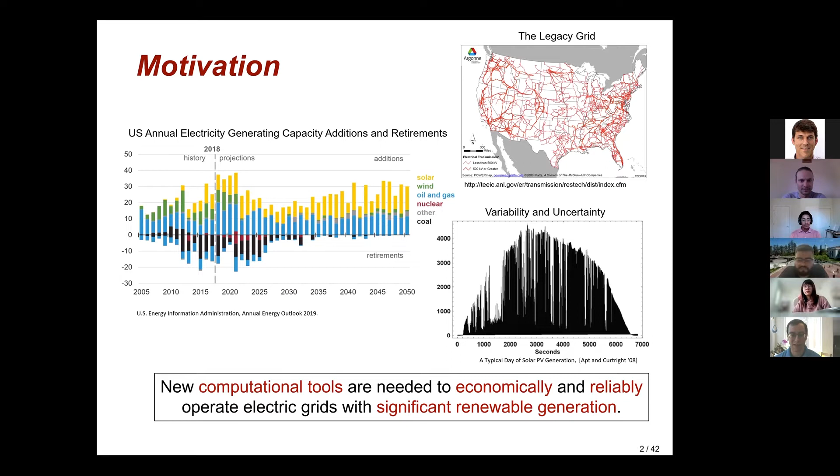Anyway, so the story is we need new computational tools to economically and reliably operate electric power grids when we have lots of renewable generation. And so at the heart of almost all of our optimization and control problems that we work on in power systems, we have some representation of the power flow equations. These are the equations that model the relationship between the voltage phasors and the power injections in the electric power grid. So here's one representation of these equations.

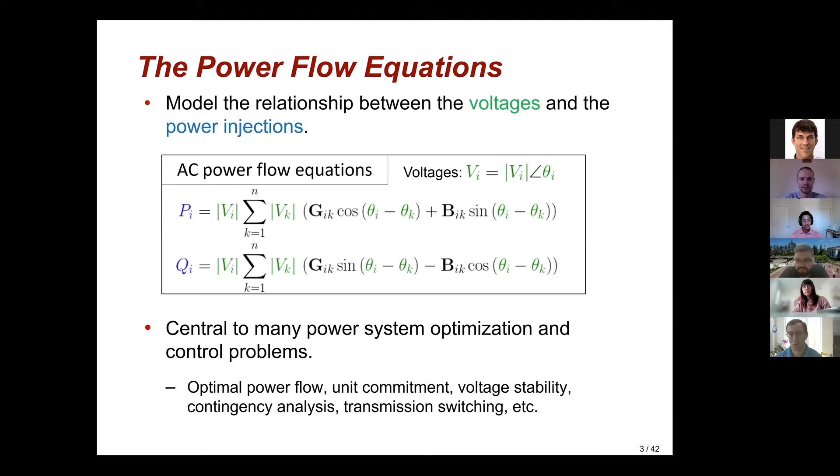Turns out there's lots of mathematically equivalent ways to write down the power flow equations. And you can actually get very different behavior depending on how you approximate or relax or represent the power flow equations in different coordinate systems. This is probably the most common representation, to put the voltages in their polar coordinates, so a magnitude and an angle, and then we get these coupled relationships between the active and reactive power injections, the voltage magnitudes, and the phase angles. And so these equations are in almost everything we do in power system optimization and control: optimal power flow, unit commitment, voltage stability analyses. Almost any problem that you care to solve will have these equations embedded somewhere.

As one prototypical example, we've got the optimal power flow problem, or OPF. This is a very stripped down version of this. I'll talk about some more sophisticated forms of this problem in a few minutes. But typically what we want to do is minimize the cost of generation. We have a set of engineering limits where we can't operate our generators outside of their upper and lower bounds. We want the voltages to be within reasonable ranges, and we have to make sure our line flows are within their limits. And then we have these power flow equations, the equality constraints representing the actual physics of the power system.

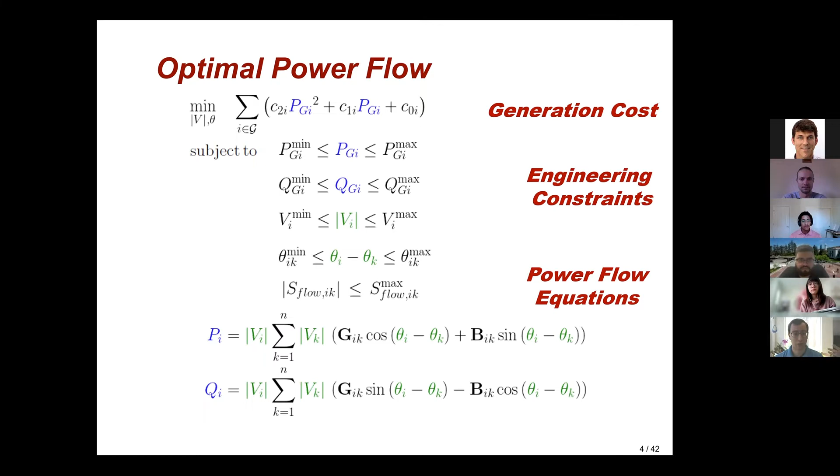And so, this is a hard problem, or can be a hard problem. People claim it's a hard problem. What does it mean it's a hard problem? Well, at least in some instances, you can have cases where the feasible space of the OPF problem is disconnected. So I'm an engineer, I like making pictures. And so we took some examples where we knew that there were local solutions, and plotted them. So here's one example. This is a 5-bus system with 2 generators. What we're showing in this figure is, on the horizontal plane, the active power output of the 2 generators, and the vertical axis is the reactive power output. And this feasible space, if you make a projection of this, looks like a Nike swoosh.

And it turns out if you enforce a lower reactive power limit on this generator 5, that lower reactive power limit is the gray plane, and it slices off the bottom of the Nike swoosh, and you're left with this global solution and this local solution here in the green star and blue triangle. And so this actually isn't too atypical.

I'll show another example in a second, but what you have going on here is voltage and reactive power limits; the lower voltage limits are defining the bound on the upper part of the Nike swoosh. And so then the reactive power limits come in, and the interaction of those two limits, at least in the examples that we're able to generate, tends to lead to these weird feasible space characteristics.

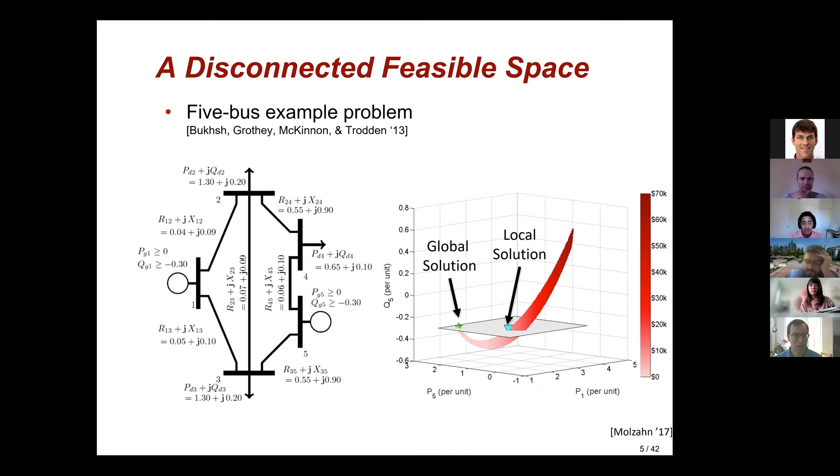Here's another example. This is a 9-bus system. It is the IEEE 9-bus system, just with modified power demands and modified reactive power limits. And the feasible space for this problem is disconnected. You've got these 3 disconnected regions here. In the normal 9-bus system, this is just a filled-in triangle.

And so what happens is by playing with the reactive power and voltage limits, you can sort of slice out this oval from the middle of this triangle, and that cuts the region into these 3 different pieces. And in this case, it turns out there's the global solution and then 3 local solutions.

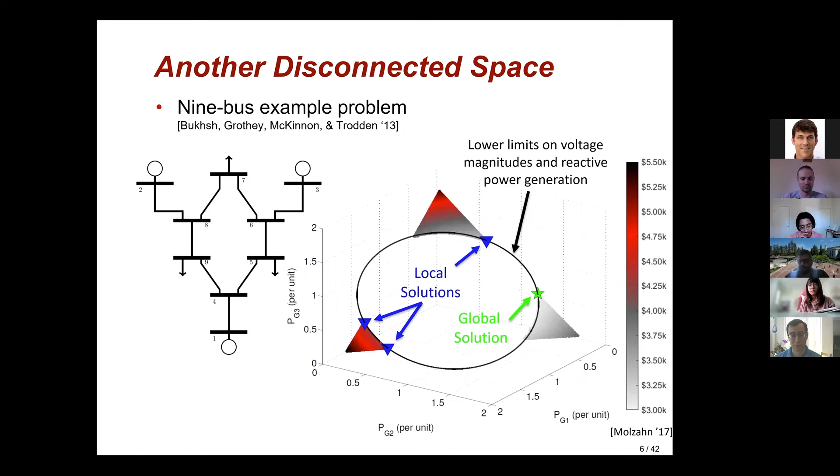Oh, and I should clarify, by local solutions what we mean is a solution that's superior to all the nearby points, but is inferior to some global solution, the best operating point further away. And so at least in principle, these problems can be quite hard to solve. And so what do people do instead?

Well, what's commonly used in practice in many applications is this DC power flow approximation. Again, I suspect most folks are very familiar with this. This is a linearization of these nonlinear power flow equations that's applicable to typical transmission systems. And so what we do is we say, well, let's just completely ignore reactive power. That's someone else's problem. Someone else is another engineer that has to make it work later. But for now, we'll ignore the reactive power.

Then we're just left with this active power equation. And in typical transmission systems, we try to keep our voltages close to their nominal values. And so if we normalize those appropriately, we can set those to 1 per unit. We still have a nonlinear system of equations through these trig functions. And so we say in typical transmission systems, let's neglect the resistances or the conductances, depending on how you want to exactly do it. Here we'll neglect the conductances, and then we can set this cosine term to 0.

It's still nonlinear because we have the sine function. And so what we can do instead is replace the sine using the small angle approximation with its argument. And you go through all these approximations, and what you get here is the textbook version of the DC power flow equations relating the voltage angles linearly to the active power injections. And so this is a bit of a straw man.

In practice, what folks in the industry will oftentimes do is much more sophisticated versions of these DC approximations. They'll build in loss approximations. They will adjust for maybe different voltage magnitudes. And there's lots of ways you can play with these equations to maintain linearity while still being related to this fundamental relationship. But this is what we teach our students, at least.

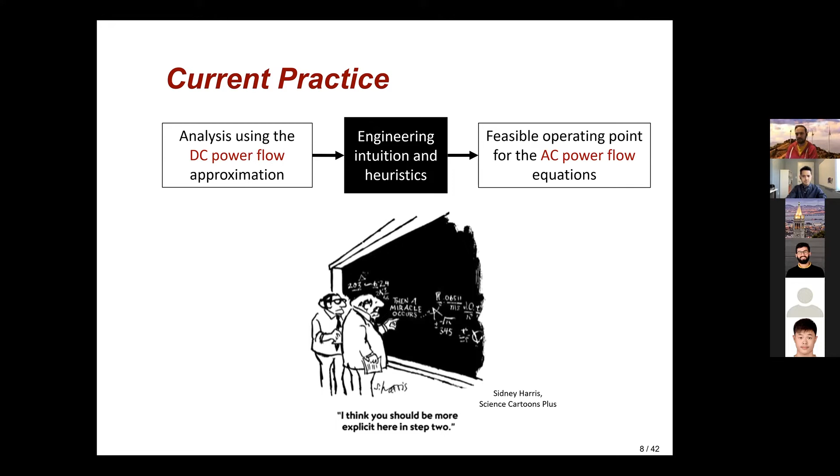But the whole history of what we've seen in power systems and other domains is the more we can build the actual physics into the problem we're solving, the better off we can be in terms of getting high quality solutions. Okay, so that's the setup. There's the motivation. So what have people done to try to handle these nonlinearities?

And I posit there's really 4 different approaches that people have taken. The first is to use local optimization techniques. This I'll go through in detail.

So, one approach people have taken is local optimization. This has proven its value in this recent Department of Energy ARPA-E grid competition. I'll get into some more details about that. But almost all the top teams were using some sort of local optimization strategy at some point in their algorithm. And so what you do here is you start at some initialization, you try to locally improve your solution until you get at least to a local optimum is the goal.

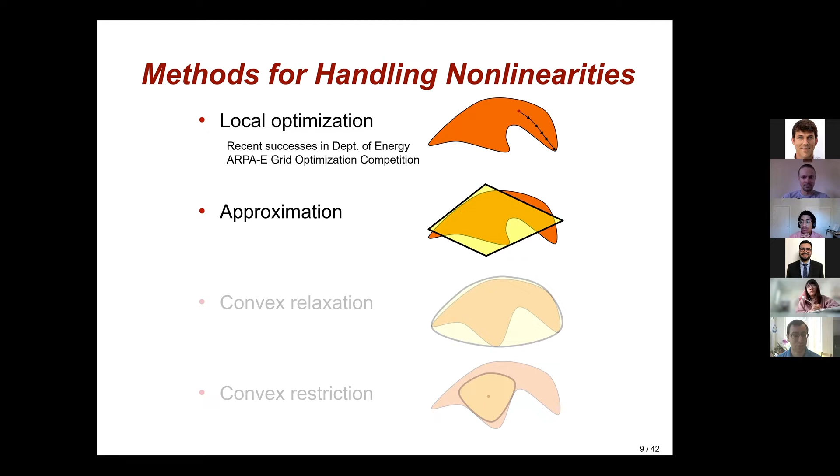Second approach people take is approximations. Oftentimes they're linear approximations because we like linearity. So this is like the DC power flow as one example. We take our nonlinear equations and we use some form of linearization.

Okay. So local optimization strategies. This general class of approach tries to find some operating point that's superior to all the nearby points, but has no guarantees with respect to more distant operating points in parameter space, or in the space of generator set points. And so these are inherently dependent on the initialization.

So imagine my cost function is improving down to the right. If I initialize here, then I'm pretty likely to find a point that is the best solution to this problem. But maybe if I initialize somewhere else, I might get stuck in a local optimum. And so that's the inherent downside of using the local approach. But oftentimes it can be fast and reliable, and there's well-developed methodologies for using this.

So we're trying to find global solutions. Oftentimes we actually do find global solutions, but we might get stuck in a local solution. And the likelihood of that happening really depends on the problem characteristics. So it's hard to say in the abstract whether you'll find the global solution or you'll get stuck.

There's two main classes of tools that people use for local solvers. One is interior point methods. The most famous of these is IPOPT, interior point optimizer. It's an open source package. Another one is sequential quadratic programming methods. One of the more famous ones is SNOPT.

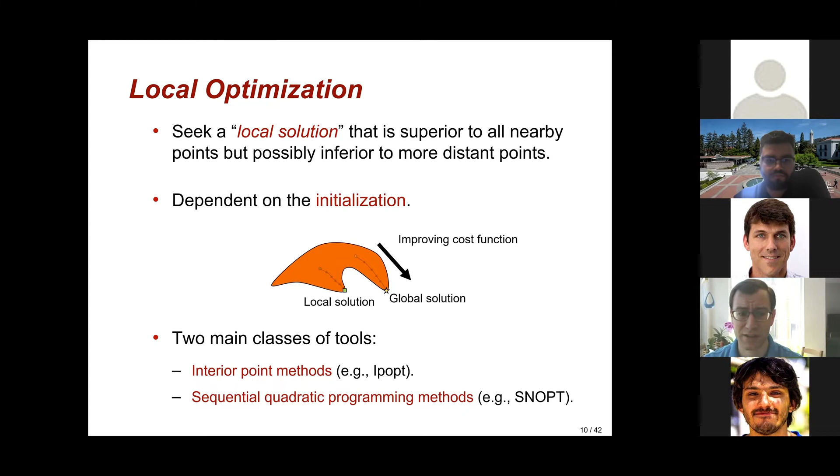So it's much more of a sophisticated method than you might have learned as a first-year graduate student in power engineering. So dig into this a bit more if you want to go in this direction. This does initialize well, but can be slower if you don't have a very good initialization. That's a very high level overview of nonlinear optimization.

So where was this used successfully? The Department of Energy had this grid optimization competition. The first round of this competition completed last year, right before the pandemic, and now we're in the second challenge, which will end this summer. This problem was to solve security-constrained AC optimal power flow problems, where the goal is to jointly optimize the generators' real power outputs and the voltage magnitude set points of the generators.

So this is not what they do in practice today with the DC power flow. It would allow you to really have a lot more flexibility in modeling this problem. At the same time, you're tasked with solving basically N-1 preventative security requirements. So if any one thing in the system failed, this operating point had to adjust in a pre-specified adjustment to still satisfy the constraints in the problem. And so this problem gets really big, really fast.

So the objective function had a piecewise linear generation cost. That wasn't too terrible to deal with. Then you had a base case with voltage limits, line flow limits, generation limits, and AC power flow equations with all the components in service. And then you had a set of contingency cases where the information transferred back and forth with the base case was the nominal set points for the generators' active power outputs and voltage magnitudes. That was the same between all the contingencies. The contingency cases were after the failure of one generator or one transmission line or transformer. So this is a pretty typical formulation that people consider.

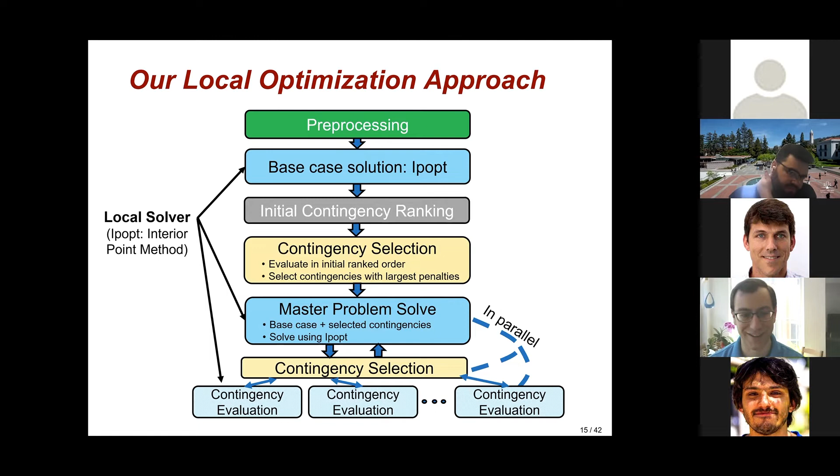And so what were the results of this competition? Here's my summary of the competition. So the top teams were able to reliably output solutions for large-scale problems with low generation costs and small constraint violation penalties. So my message to, I suspect not too many industry folks here, but my message to people in the industry is this works.

Not just our team, but other teams, you can solve large nonlinear problems and get better solutions than you would get if you just applied a DC power approximation. So we should be doing this, is my takeaway message.

How did local optimization do in terms of these problems? Now, here's the top teams. I'll brag for a second. We got second. So this is myself and Andreas and Ermin at Northwestern, and Elizabeth at UCSD, and Frank is at Lehigh. Really fantastic work with them.

And so a couple of takeaway messages I took from the competition. First of all, relevant to this presentation, IPOpt was used, I know, by at least 4 of the top 5 teams. Different problem formulations, different strategies for using it, but they were all using some form of local solver. And I suspect actually more of the teams were as well. I just don't know exactly what.

The second takeaway message from this is, if you look at a lot of the top teams, it was involving folks with both optimization experience and power systems experience. Either optimizers with power systems experience, power systems folks with optimization experience, or mixes of both. And so that was really crucial for this competition.

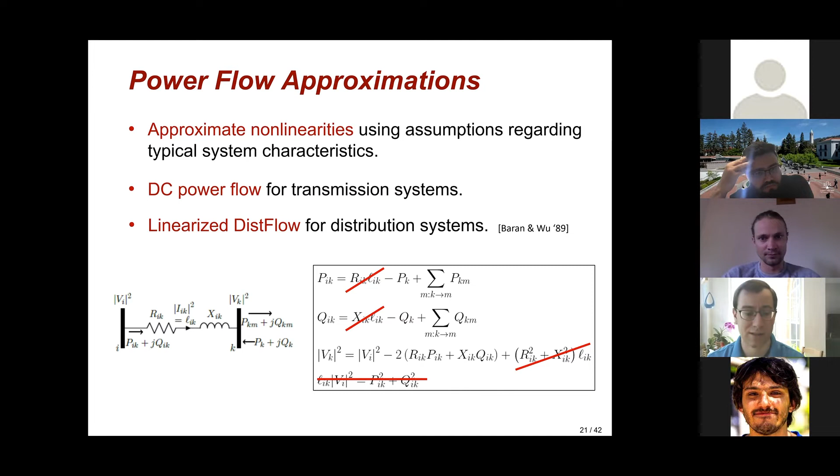What about approximations? There's been a lot of work in trying to approximate the nonlinearities using assumptions on typical power system characteristics. The most famous of these are the DC power flow approximations for transmission systems. I stepped through these earlier. But you're probably also familiar with the linearized DistFlow equations for distribution systems. These were developed in the late 80s by Baran and Wu. It's a different style of approximating the nonlinearities. Basically, it simplifies the loss terms in distribution systems.

And I'll mention there's been a huge number of alternative methods for making approximations. So Ian and I put together a survey paper. This took us, I don't know, 4 or 5 years to write. Hopefully you find it useful, where we tried to look at all the approximations and relaxations that people have used for the power flow equations. So if you're thinking you've come up with some fantastic new power flow linearization, maybe you have, but double check, because a lot of people have done a lot of stuff.

Okay, so what is the fantastic new power flow approximation that we came up with that I'm pretty sure no one's done? We've been calling this class of approximations optimal adaptive power flow approximations. This is work with Sidhant Misra at Los Alamos and DJ, who was at PNNL, and Tillmann, some folks in Germany. The goal here was to come up with approximations that worked well over a range of power system operation.

So not just: I give you an operating point, what's the best linear approximation? Well, it's the Taylor approximation. We teach all second-year calc students this, right? And that's the best local approximation. But maybe I don't know what my operating point is exactly going to be because there's lots of uncertainty. I'd like to construct a linearization that works well for a range of operation.

We came up with an algorithm that would minimize the maximum linearization error over an operating range. Start with some linearization, then compute the largest linearization error with respect to that existing linearization, and update the linearization to minimize the maximum error. Okay, this is maybe better, but it's not great. So then you iterate again, compute a new worst case operating point, and update the linearization.

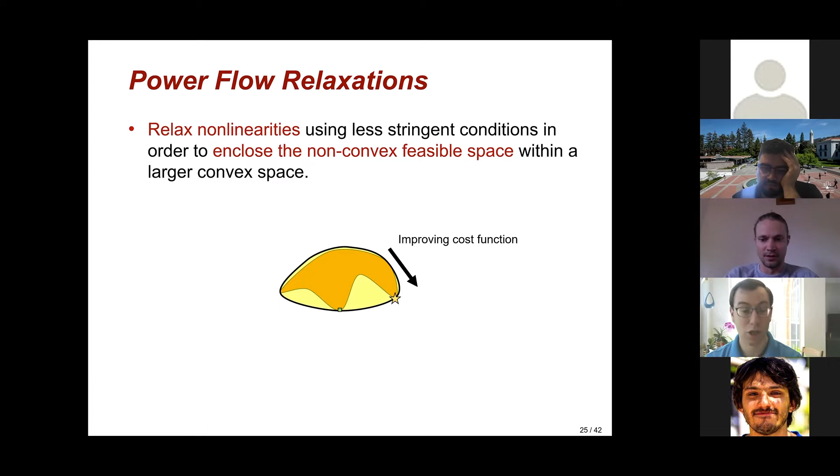The idea here being that we take our non-convex feasible space, we relax the nonlinearities, and we enclose this non-convex region within a larger convex space. So here's the example I gave before. We've got this global solution, the local solution. We wrap a convex region around this non-convex region. Then we know that we can find the global solution to the convex problem.

If it turns out that the solution to the convex problem is the same as the solution to the original non-convex problem, well, that's great. In that case, we can recover the original global solution. We have a certificate that we've got the best global solution. There's zero relaxation gap. It'd be great if that always happened.

From my perspective, relaxations have 3 main advantages over local solution algorithms. So why use a relaxation? If you're not using one of these 3 features, you might be doing something wrong. So one thing it does, it allows you to bound the optimal objective value. You do get upper or lower bounds depending on which direction you're maximizing or minimizing, conservative bounds on the objective function for the original non-convex problem.

It also allows you to certify infeasibility. So if the relaxation is infeasible, then the original problem is guaranteed to be infeasible. And since the relaxation is convex, you can prove infeasibility with existing methods. So that can be helpful. And it turns out that if you solve these certain relaxations, if they satisfy some checkable conditions, then you can show that the solution to the relaxation is the global solution to the original problem.

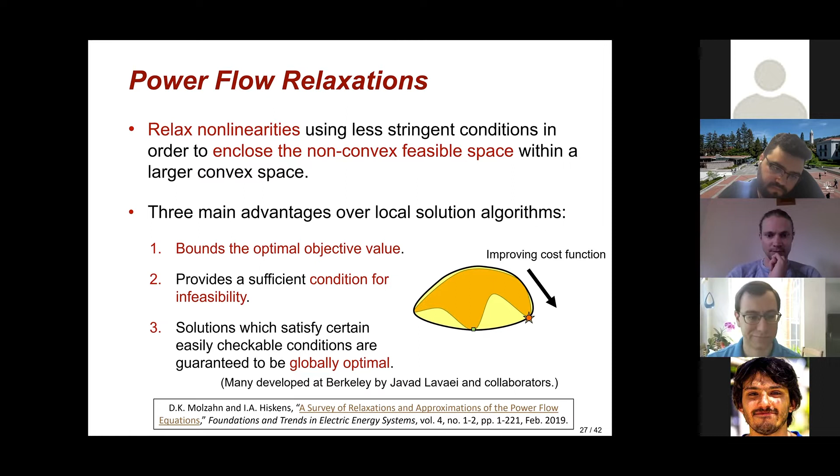What's an example of a relaxation? Oh, I want to get to restrictions. Do we stop at the top of the hour, or is it a bit long? So Dan, you can just keep going and folks can step off as necessary. Whatever is best for you, but I'm enjoying the talk. I imagine others are as well, so don't feel obligated to rush. Okay, sounds good. I'll keep talking then.

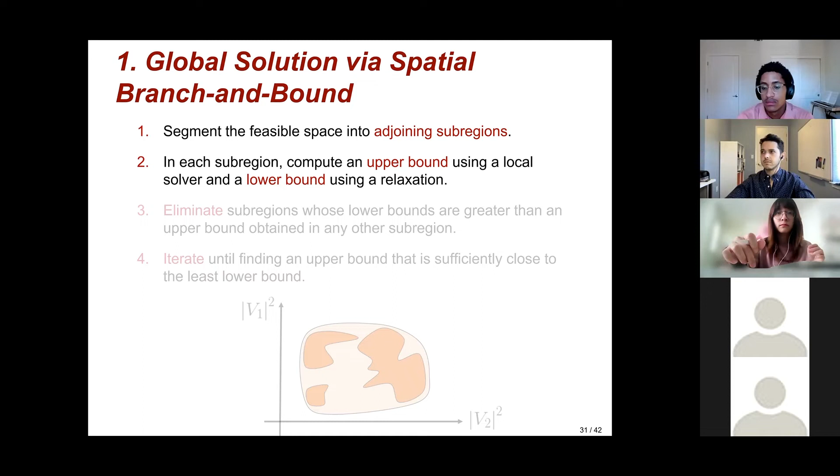So the one natural thing you could do is say, let's just try to find a global solution to some problems, proving what is the global solution to these problems, like OPF problems. So you can take your non-convex region, split it into pieces, and do what's called spatial branching. In each of these pieces, you compute an upper bound with a local solver, a lower bound using relaxation, very similar to mixed-integer programming branch-and-bound style solvers, to eliminate regions where you know the global solution can't exist. And you keep iterating and splitting these regions until you get a tight enough bound where you say, okay, we've got the global solution.

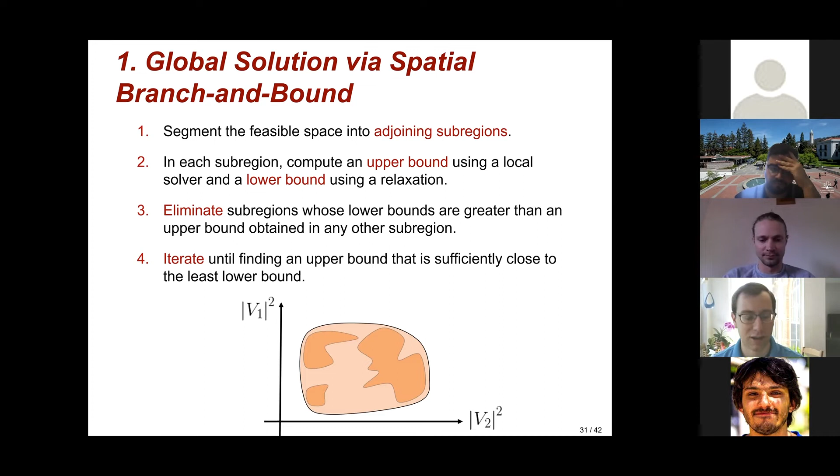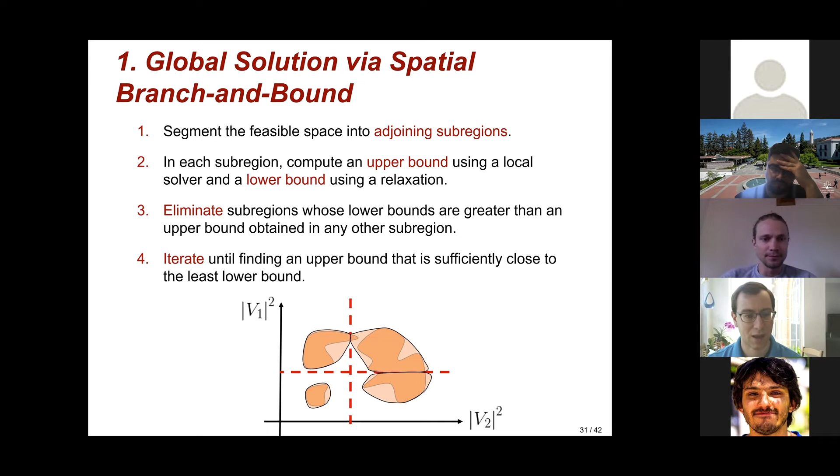So as an example, here's our non-convex region. We wrap a convex relaxation around it. If that's not tight enough, we can split the region into pieces and put relaxations around each piece, and identify regions in which the objective function bound tells you the solution can't be in this region. So you can ignore it and focus on other regions. This is a very popular approach, standard tools in industrial engineering. So this is the natural thing to use a relaxation for.

Another thing you can do is use a relaxation to certify power flow insolvability. This is a question that has been of interest to power system engineers for a while: I have some operating points, I have some load demands. I want to know, is this a feasible operating point? Can I satisfy these load demands? So what do?

You go away and plug it into Newton-Raphson method. You initialize your Newton-Raphson method with a flat start, and you try to converge to a solution, and Newton-Raphson fails. So then you try again with a different initialization. You try again, and try again, and try again. Eventually, you can't find any initializations where Newton converges.

It doesn't mean that there's not a solution. Maybe there is. You just had a poor initialization. Turns out these regions of convergence for Newton methods tend to be fractal. And so it's really, in principle, hard to know. A relaxation would allow you to know for sure.

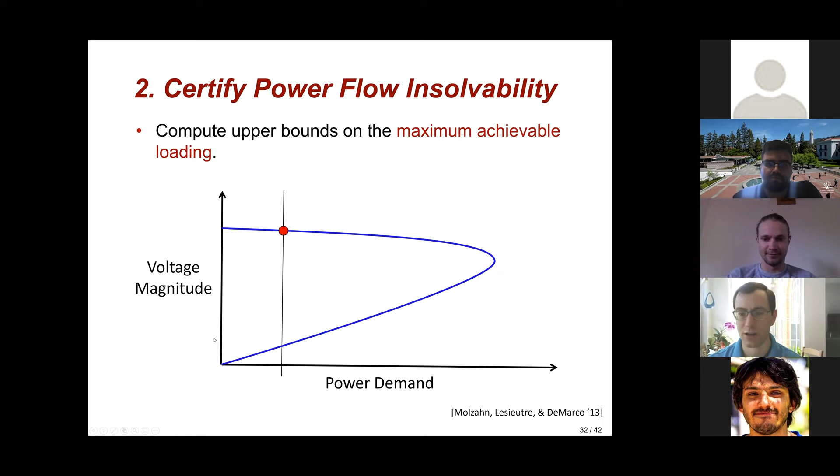So this is this fairly famous PV curve where we're showing the power demand on one axis, the voltages on another axis. And what you can often do is you can show that beyond some value of some loading demand, I can solve a relaxation to show that no solutions can possibly exist beyond this point. So I don't know how else to do that. Relaxations allow you that capability.

Another approach that we've used this for is for solving robust optimal power flow problems. So if we have some uncertainty in our problem from wind and solar generation, what we'd like to do is to guarantee that our solution will satisfy the constraints, not just at the nominal operating point, but also for variability. We have some load variability or solar variability.

And so you can imagine, here's some cartoon example where I've got the current flow on some line on the vertical axis, and I solve an OPF problem, and it schedules me right up to that limit. So that's what it'll do. It'll use the line flow limit as much as possible. But in reality, that's not the real power flow that's going to happen. Maybe the wind and solar push me around, and so I might violate those flow limits.

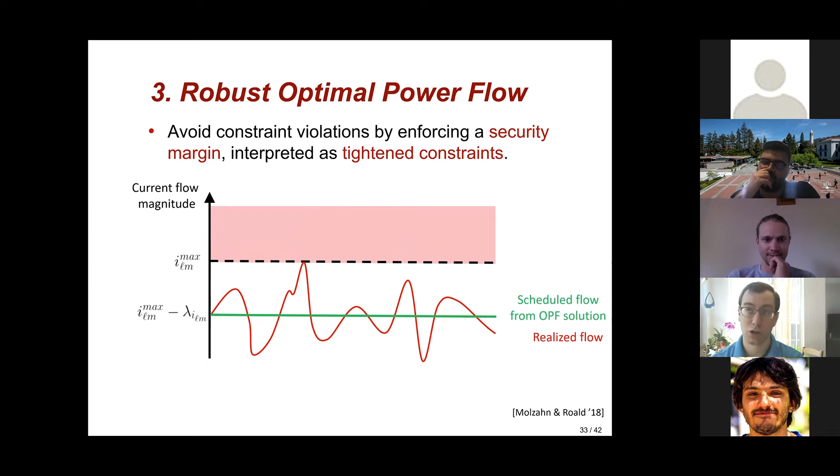And so what you might want to do is to say, well, how much would I have to back away from my actual constraints so that I'm sure that I choose a nominal operating point such that I don't violate the constraints when the uncertainty is realized? How much, in other words, do I have to tighten the constraints from their specified value to account for the uncertainty? What security margin do I want to impose?

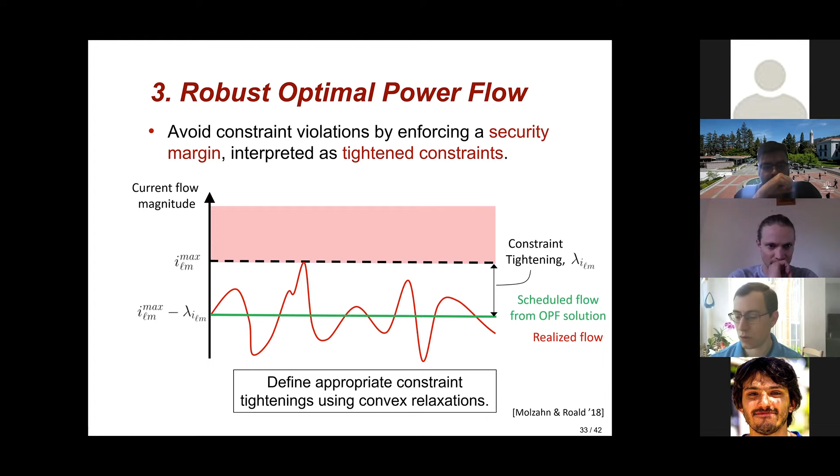And so we have a paper on this, Line Roald and I put this together in PSCC, where you can compute using a relaxation how much I need to tighten those constraints. And so, again, I'll refer you to this paper if you want to see all the details, but this is not a cartoon example, it's an actual example. There's a 3-generator, 3-load system where we have plus or minus 5% uncertainty at each load demand.

And the feasible space for the nominal problem looks like this sawtooth shape here, where I'm showing on the axes the current flowing on different lines in the system, 4 to 2 and 4 to 1. And it turns out the solution to the deterministic problem would push you right up against, at this red square, the flow limit. But then when you actually sample a bunch of uncertainty realizations, what you see is about half of them violate the line flow limit, which makes sense.

You're perturbing your solution. And so what you can do is you can use a relaxation to say, how much do I need to back away from this? Basically what you do is maximize over the uncertainty set. How much can the flow on this line change as my uncertainty varies? And then make sure that I back off by enough so that I don't violate any of the limits when the uncertainty is realized. And the nice thing with doing this is it only uses the objective function value, the bound on the objective function, which I know is valid.

I don't have to worry about the relaxation. If the relaxation is inexact, it just pushes me further away. If I don't have a tight relaxation, I just move further away from the bound than I otherwise would have to be. But fine, I operate the system a little bit more conservatively than I would have to. If the relaxation is inexact, it doesn't hurt me that much. So we like this. This is fun.

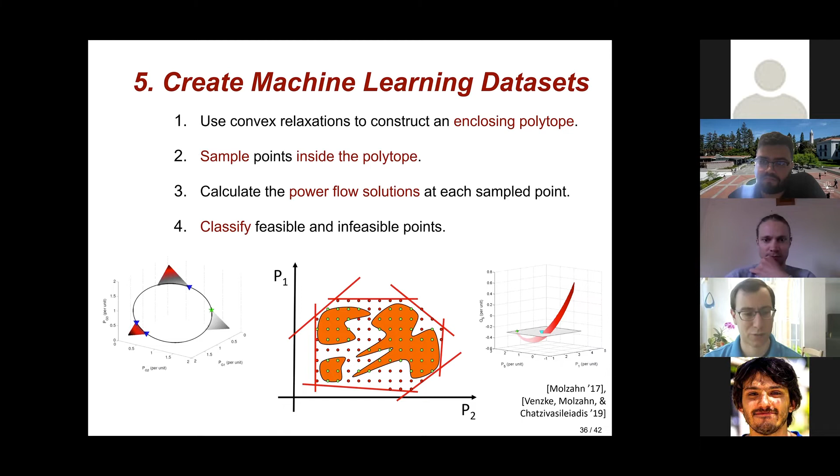Cool. Okay. That's all I want to say on convex relaxations. Can I go ahead to convex restrictions, or do you guys have any other questions?

No restrictions? Yeah. Okay. All right.

So what is a convex restriction? This is really cool work. There's a whole body of work that folks have done with this. A lot of it's been at MIT with Kostya Turitsyn's former group, some of the folks at EPFL, at Mario Paolone's group. Who else? DJ has done work on this. This has been a really cool topic.

And so the goal is, this is sort of the converse of a relaxation. I give you some non-convex feasible region, and I give you some points inside that non-convex region. I say construct a convex region that's completely enclosed within the non-convex region. All the methods that people have developed so far are based on fixed point theorems, like Brouwer's fixed point theorem is pretty popular. And these are all dependent on a base point. So if I choose a different point at which to construct this restriction, I get maybe a different restriction.

So here's some examples. I'm going to skip the math here, I could talk for a whole hour on the math behind these things. But one of the points that I would emphasize is this, it's a nice picture, right? It makes a lot of sense. I take this point, I expand the space inside.

But what gets really tricky when you try to do this is in the OPF problem, or power system optimization problems, we have equality constraints. So we have some equations that have no interior, there's no volume. And so how do you construct a restriction of a region that has no volume? That's not so obvious what that even means. Like, how do you define that?

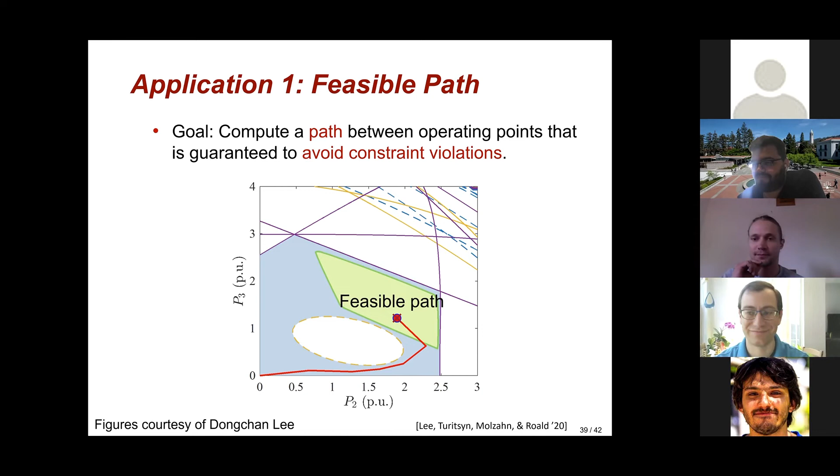Right now, this is just not a problem in the DCOPF at all because you can't have holes in your feasible space for the DCOPF. So this is just never an issue. It doesn't mean it's not actually an issue. It just means we ignore it. Yeah. Okay. Cool. Let me give one other example, and then I think I'll probably be almost wrapped up.

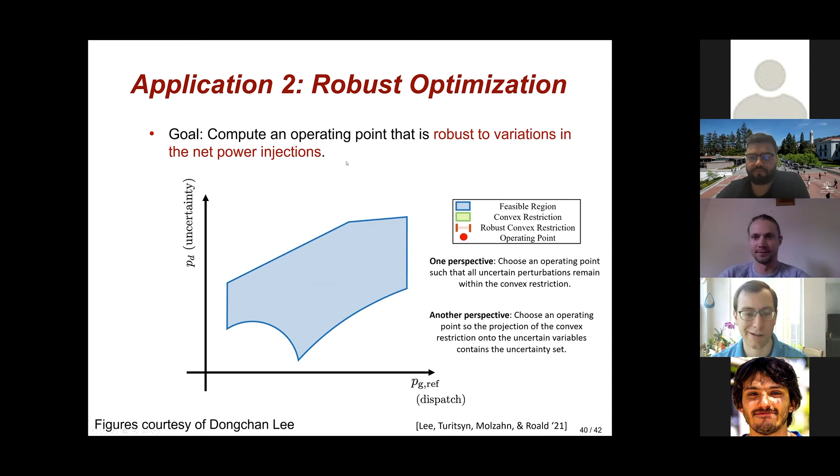I'm sorry, I'll lock up my computer.

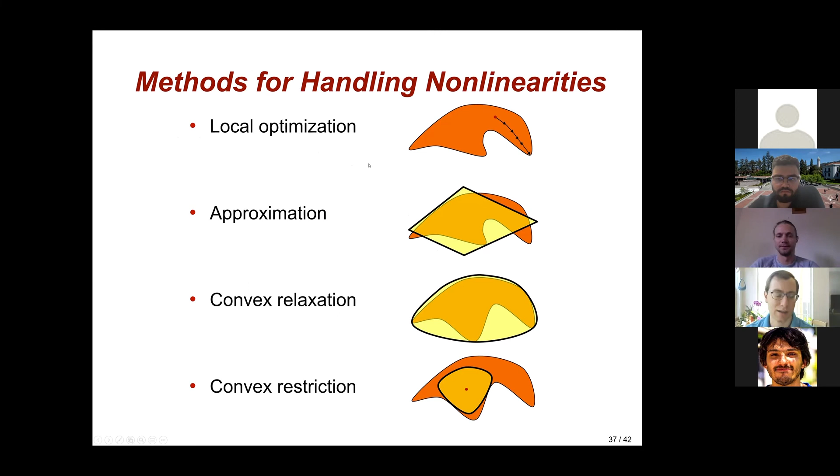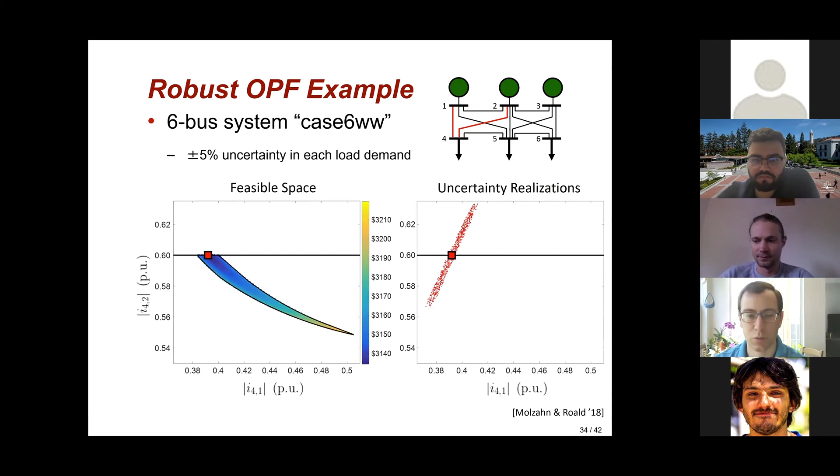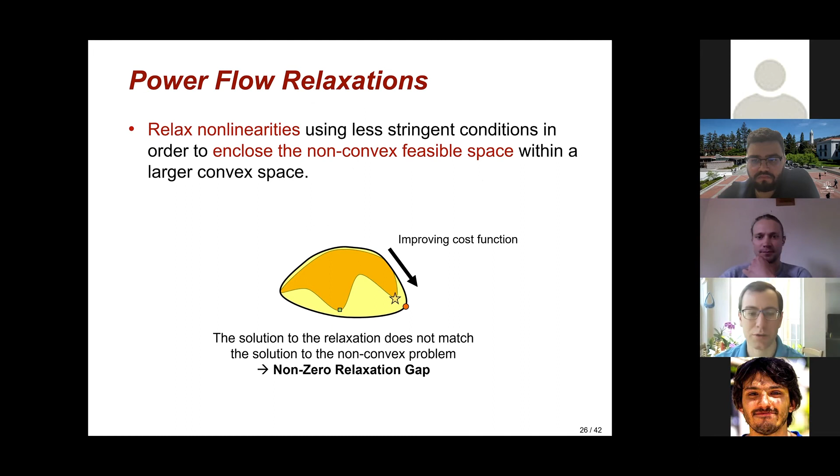And those are somewhat difficult to relax, but I talked with Andy Sun about this, and he mentioned that they had tested a handful of the test cases from the competition. We didn't look at whether it was global or not. Turns out there wasn't a lot of time to do everything you need to do for this competition. But Andy indicated that most of the time, with some simple relaxations, they were getting pretty good bounds. So I suspect we were probably getting the global solution with respect to the AC power flow nonlinearities. Whether or not we had all the right contingencies, that's a different story. Does that answer your question?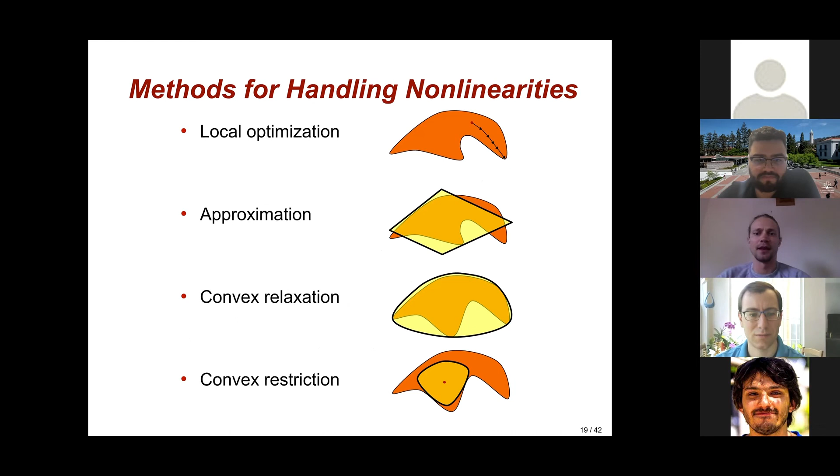Yeah, thanks a lot. Can I ask a follow-up to the first question that Gabriel asked about the feasibility of the solution of DCOPF? You mentioned briefly in your talk that there are industry practices for incorporating losses and other tricks of the trade. Do you have a resource that might explain how that's done? So the best, most accessible paper I know of on that is one by Brian Stott. Brian Stott is one of the giants in this area from the 70s and 80s, who developed a lot of the methodologies we use today. I read his Revisiting DCOPF paper. Yeah, that's what I was going to suggest.

I think you could also dig into the operating manuals for the ISOs, and you could probably find it in there. I've never looked, but friends who work at ISOs say it should be there and that there's all sorts of stuff they do. Probably light reading. Read Brian's paper first. I've wondered about that in the context of locational marginal prices, because if you don't take into account losses with locational marginal prices, the market operator can actually be insolvent because they're selling less power than they produce. So it's a super interesting problem, something I've looked into.

Interesting. I hadn't thought about that specific problem, but there's a lot of things that work well in theory. And then when you see how they actually implement things, for instance when it comes to pricing, they need a feasible problem. The problem can never be infeasible. So what they'll do is penalize constraint violations, and that's what the grid optimization competition does too. But then what does that mean for your dual variables? If I add a really big penalty term to the objective function, my dual variables get all messed up. They don't actually represent the marginal cost of generation anymore, and then somehow you have to massage those.

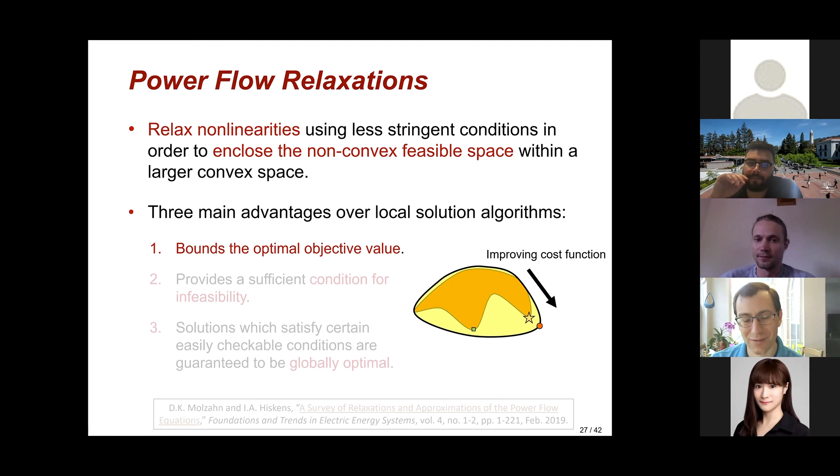Okay, and then Han asks, interested in the computational complexity of convex restrictions and whether there's a trade-off between the volume of a convex restriction and the computation time. Yeah, so this is a good question. So it turns out that the way that they formulate these convex restrictions, let me see if I can advance here. Sorry, I have too many animations. There. Oh, this is exactly the slide.

Yeah, so there's a ton of papers on this, right? This goes back to like 2015. There was a lot of work on this stuff. When you look at the very first papers by Hung, Nguyen, and Kostia's group, those very first restrictions were tiny. You could show, I got some operating point and some very small ball around it was feasible. And then over the course of all this work, people were able to grow those convex restrictions to be much bigger.

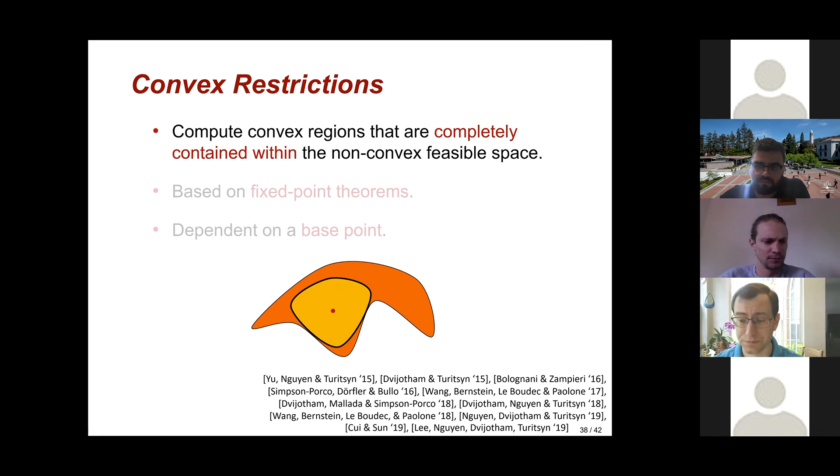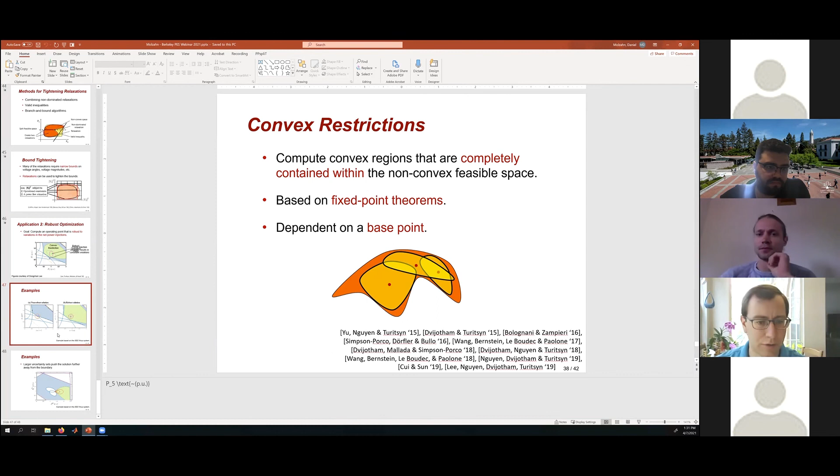Let me see if I actually have a picture of some of them. Here's an example, sort of. This isn't exactly what I was hoping for, but you can see that they can be pretty big. They started off being pretty small, but they can be pretty big. Now, that doesn't necessarily come with a higher computational cost. They just came up with better methods for characterizing the region and constructing their convex restriction.

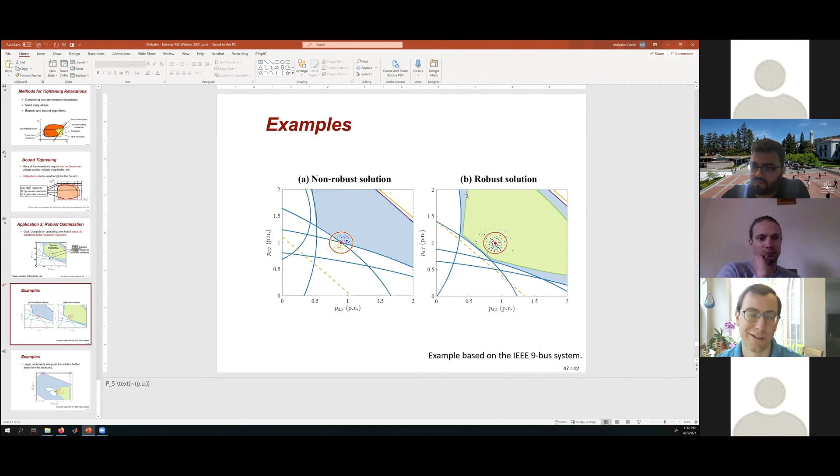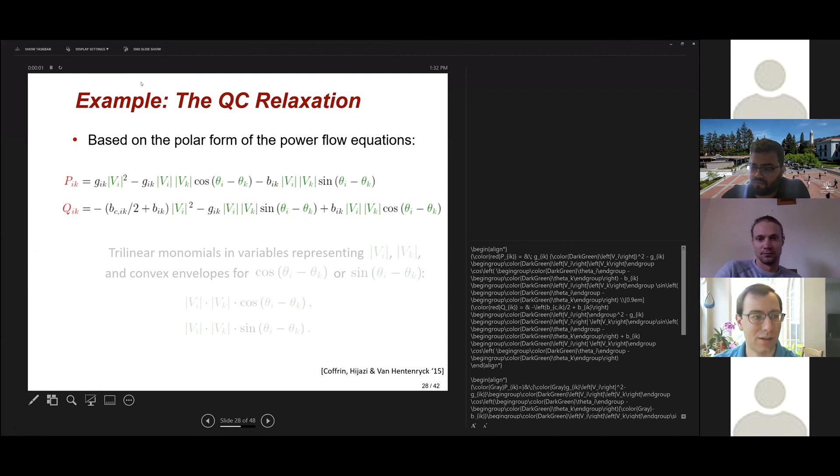It turns out they're formulated as systems of convex QCQPs, quadratically constrained quadratic programming constraints. So they're actually pretty tractable. You could throw it at Mosek or CPLEX or something like that. They're not SDPs. And as for the computational effort involved in solving them, they came up with really clever ways to deal with it. Let's go back. It's in some ways deceptively similar to this QC relaxation idea.

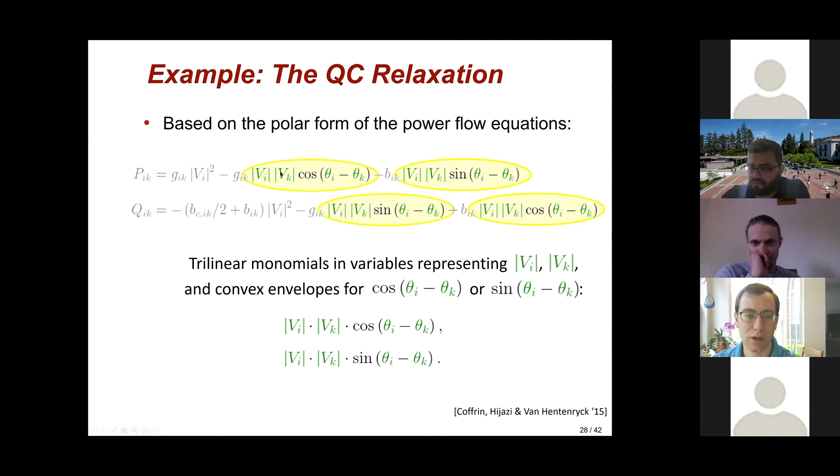It's not the same thing, and it makes my head hurt every time I try to switch from one to the other. But what they do is they look at each of these prototypical nonlinear terms. They look at polar coordinates, or at least that's the formulation that Dongchan uses. He's got a voltage magnitude and a trig function. And in the same way that Carleton and Hassan and Pascal came up with these convex envelopes, they come up with concave envelopes. And these concave envelopes are key to making the whole machinery of these convex restrictions work.

So it really flips this convex relaxation idea on its head. Before, you're trying to make convex envelopes like these parabolas and these boxes; here they have to construct concave envelopes. And then they use the corner points of those concave envelopes in making the restriction. So the quality of the restriction is much more dependent on the tightness of those concave envelopes. And people might come up with better ways of making concave envelopes that are more computation intensive to construct, but the envelopes that Dongchan has now are just QCQPs.

Han, I don't know if you're still here. Does that answer your question? Yes, it does. Thank you very much.

Cool. So if you're tired of thinking about ways to tighten convex relaxations, if you want to expand convex restrictions, think about how you can come up with concave envelopes, which is weird. All the intuition I have for what to do in those cases sort of doesn't fit well. That's really cool. Yeah, it's neat work. It's been fun watching that work evolve. We've just tried to use it.